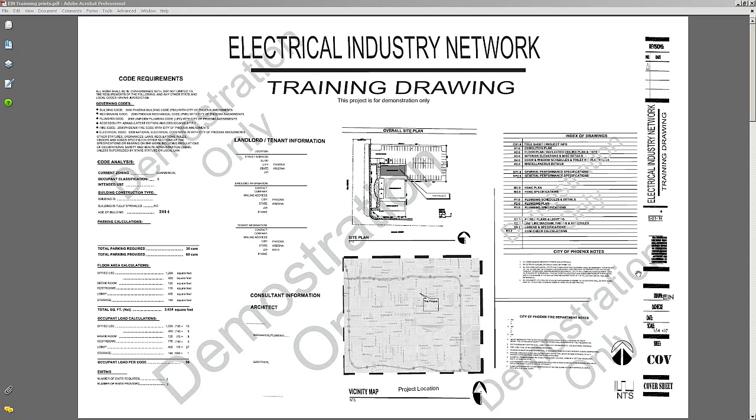In this drawing, we've already taken a look at the cover sheet, so we'll move on to the next sheet, which is E1. On sheet E1 is basically some of the same things: we have the title block, dates, the sheet numbers, the scale drawing, the north, and some other things we didn't look at on the first one.

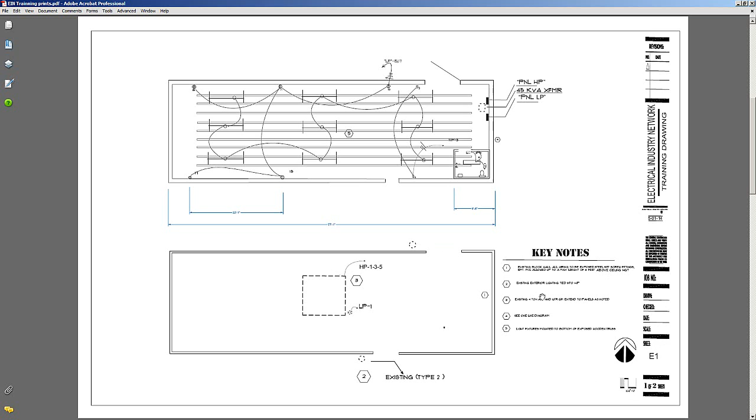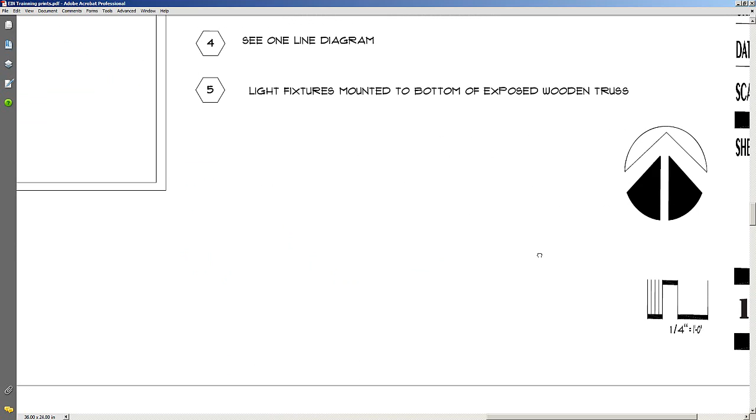Let's take a look at the scale down here, where a quarter equals a foot. In case you don't know what that means, I'll explain. I have some dimensions up here, so if you were to take an architect's scale, a tape measure, or electronic wheel and measured across here, that would equal 4 feet.

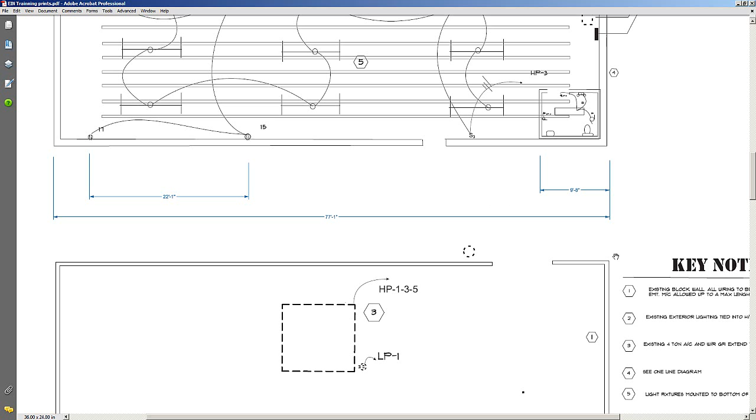In this particular case, I measured it out. We came up with 77 foot 1 inch and 22 foot 1 inch on the spacing of these outlets. Those are arbitrary numbers right now, not meaning anything with these outlets, just for explanation of the quarter inch scale. So a quarter inch equals a foot. Measure off a quarter inch, that's going to be a foot.

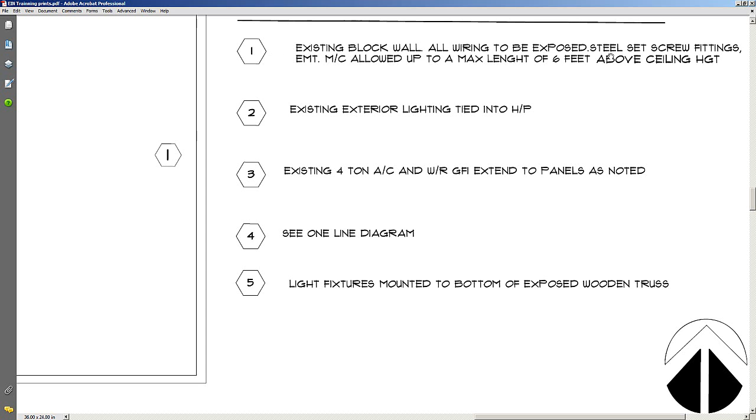Let's take a look here. We've got this little symbol with a 3 in it. This is keynotes, so we'll move into the keynotes. What this is explaining to me is that there's an existing 4-ton AC with a GFI and extend to the panels as noted. We have the number 1 in the symbol, and it's an existing block wall. All the wiring is to be exposed, set screw steel fittings, EMT, MC allowed up to max 6 foot. That gives you a basic idea of what's going on in this page.

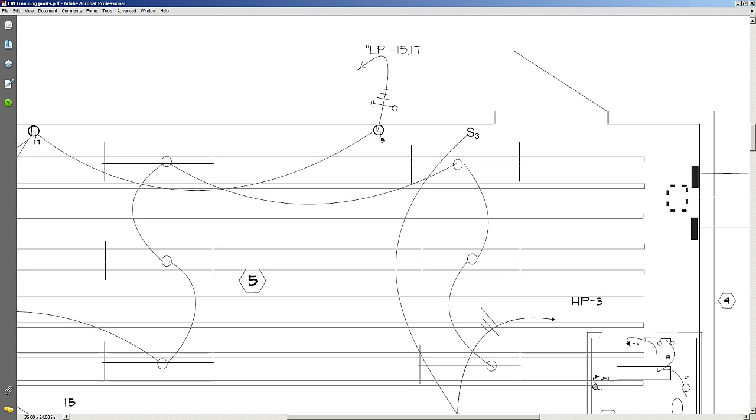We've got a number 5 up there, and we've also got a number 4. Next, this is a home run, telling me that all the outlets here are on 2 circuits going to the LP panel. Most of the time LP stands for low panel, and that's circuit 15 and 17. Down here we've got a symbol for ground, neutral, and 2 hots.

We've got our switching in here. The lighting is on a 3-way. It goes to HP, which is most likely a 277/480 volt panel, putting in a transformer there. We'll take a look at that on the 1-line diagram.

Your light fixtures, if you take your scale out, you're going to be able to scale that out and find out that those fixtures are 8-foot fixtures. Another way to tell, we'll get into that in part 5 of the symbols legend, and we'll talk about that a bit more.

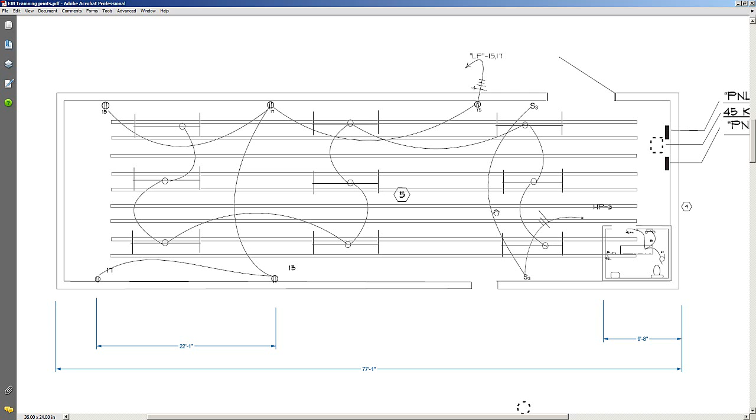Down here we have a little restroom layout. We've got a GFI in there, and a light - we've got to figure out what kind of light that is - an emergency light and an exhaust fan. A lot of this stuff we'll find out on the symbols page.

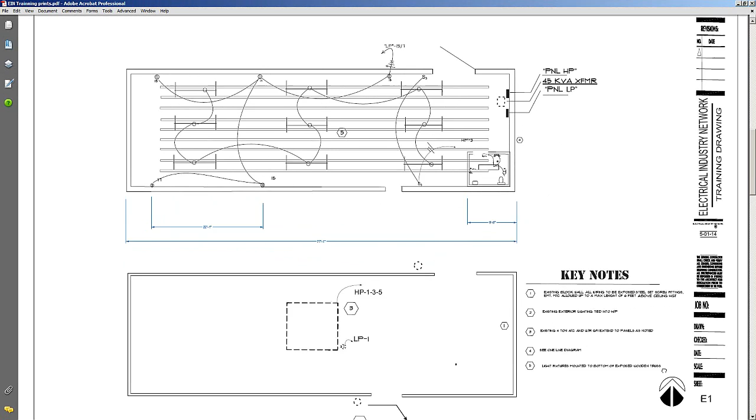So really that's about it on this particular page. Like I said, you've got your notes here, which are your key notes. You have your scale down here, which this one is a quarter equals a foot. Then you can go through and take a look at your symbols here and find out your outlets, your switches, your home runs, and panels and such.

So in part 4, we'll go ahead and take a look at the 1-line drawing.